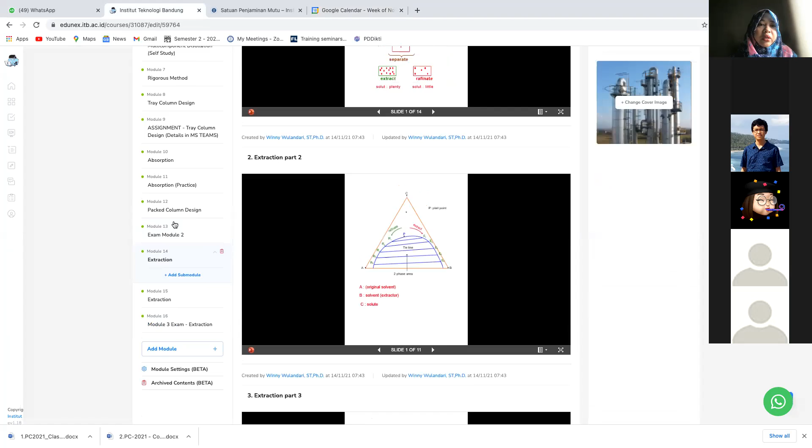Right, okay, go back to here. So we have the extraction. Now I'm going to go back and start the presentation about pack column.

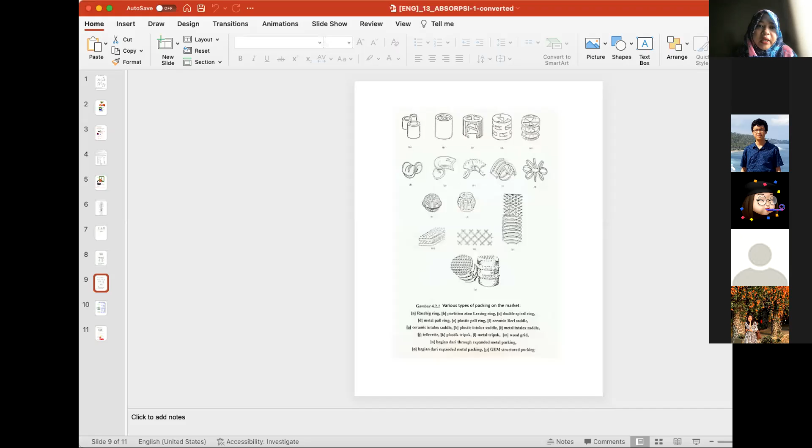Just to remind you about the presentation I gave a few weeks ago: usually for the pack column or tray column, we should be able to do the tray column presentation soon, so you can get feedback about your design and have more ideas how to design the pack column.

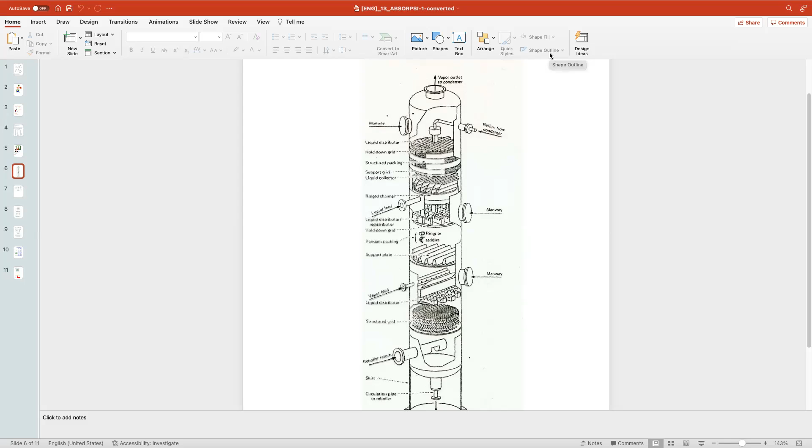Hopefully, yeah. Okay, so after this, you can see the assignments as well on MS Teams. Your next part is to design the pack column, the pack column for absorption.

This is very important, because — just wait, I need to close the door. Okay, so the oral exam, even for the tray column and the pack column, is good in a sense that it takes about 40% of your total exam, because we have 5 exams, so it counts 40%.

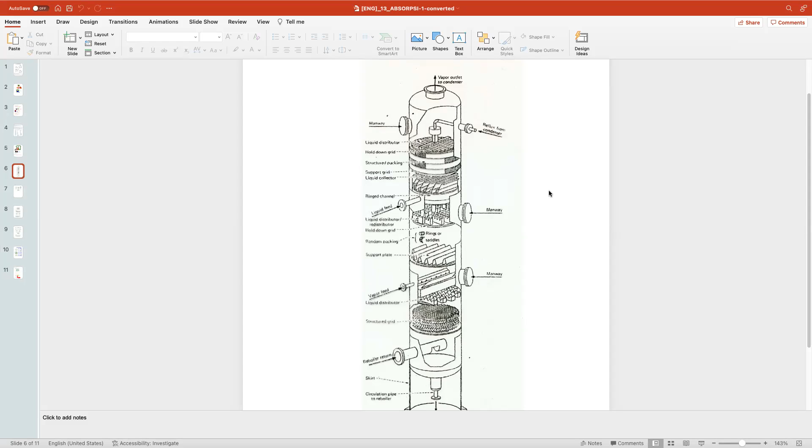Usually the mark would be much better compared to the written exam. So that's actually an advantage, and it also gives you skills about how to design something, which you should experience with your tray column design.

Okay, just a little bit of feedback on your report. In the specification sheet, it's like if we want to design something, or if you want to buy a design — let's say I want to buy Lego toys or something — I would look at the pictures. So the schematic of the equipment, the measurement and the technical drawing is very important in the specification sheet.

I think most of you didn't put the specification, didn't put the drawing of what your column looks like, but we would like to see — if you want to buy something, you need to imagine what these things look like.

If you want to design the tray column, you need to know how much is the height, how much is the diameter, where is the manhole, where is the side hole, what is the type of the cap, what is the spherical shape, and where are all the parts. This is also the case with the pack column.

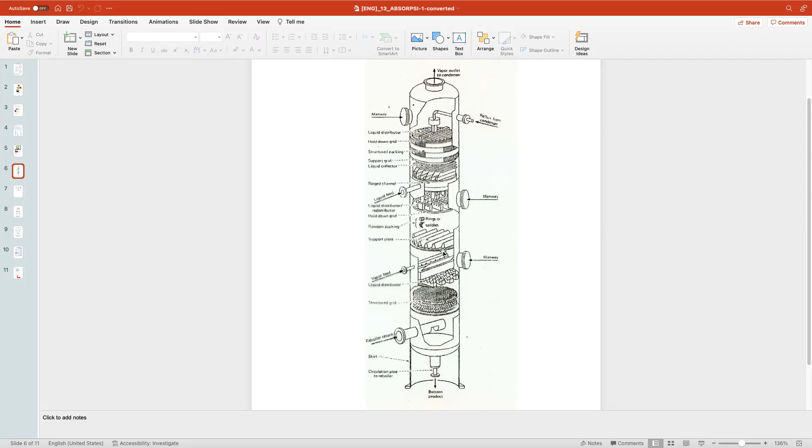In a pack column, when you want to design it, you also need to consider the manhole or manway, the hole and manway, and then the distributor, where the vapor feed comes from, or where's the vapor out, and then where is the liquid feed, and so on.

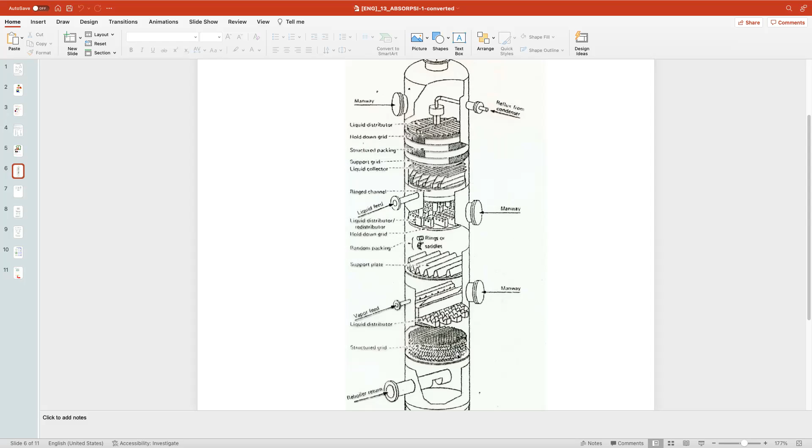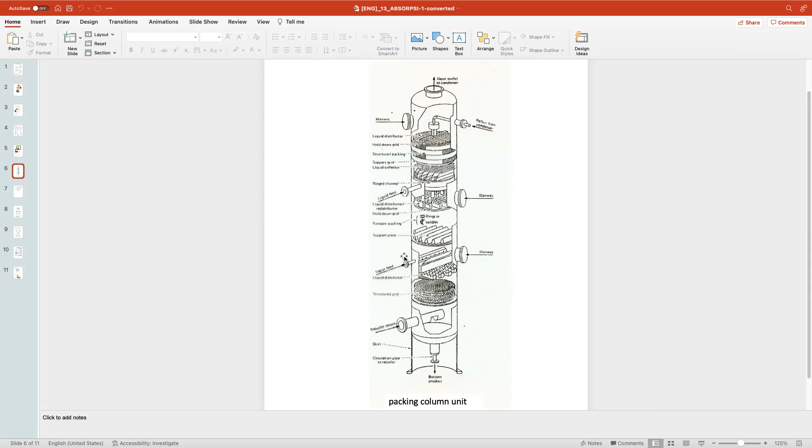You also need to understand that the height of the packing that you design is just the height of the packing itself. If you look at a typical tower, there are rooms inside - for the cap, for example, there are quite a few rooms. So your total height of the column, when you design it later, should be the total of the pack column, the packing, with addition of some other accessories. You need to consider that.

We also talk about the type of distributor, the type of packing, and you may want to have a look at these slides.

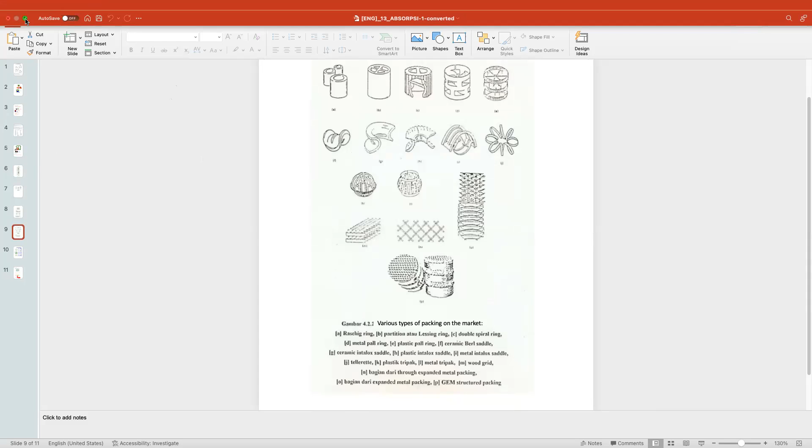Now let's start checking the pack column for today. What we would like to do, what you should aim for, or what you can expect from listening to my presentation, is that you should be able to know how to design or determine the height of the pack column, and also how to design the column.

This is very basic - we know it already, and you had the exam last week, that the height is actually the height of the unit multiplied with the number of the unit. For example, if we consider the overall gas, then the height is influenced by HOG multiplied with NOG.

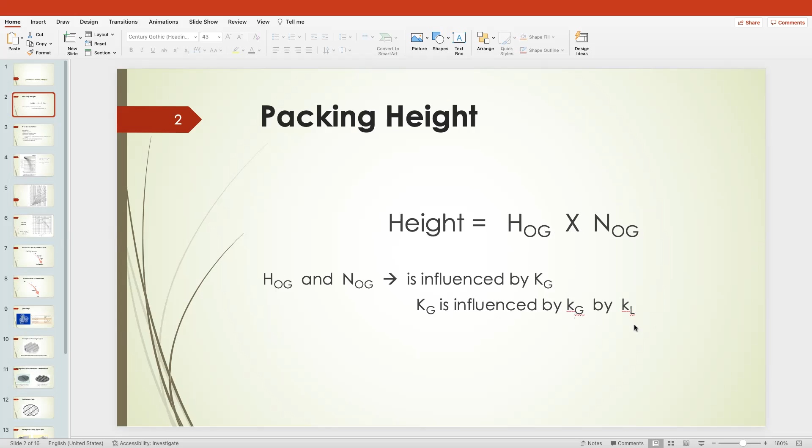If we consider this basis with the overall gas, then we need the capital K, which is the mass transfer overall for gas. It is also influenced by the small kg, and also small kl.

In the book, you may want to revert to the Coulson and Richardson book that you should already have, and find the section about pack column design. I don't remember the exact pages, but you may want to have a look at the section about column design.

First we calculate the NOG, the number of transfer units based on the overall gas mass transfer. To calculate NOG, the book uses different approaches. Do you remember what is the formula to calculate the NOG or the NTU?

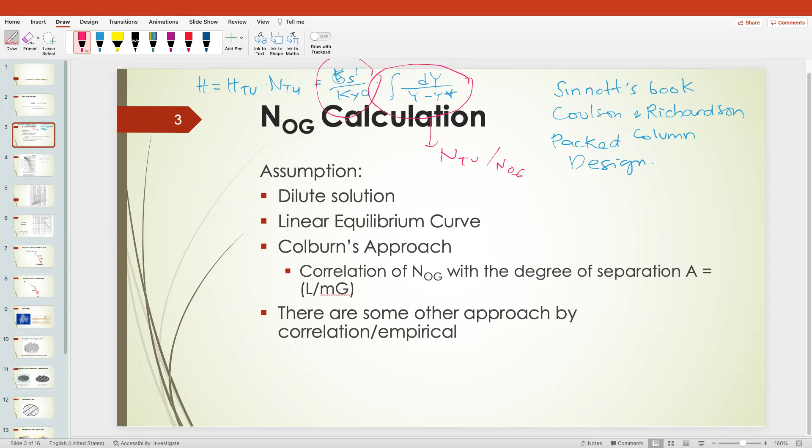It's the same. If I remember correctly, it should be GS dash divided by KYA, multiplied with the integral of dy, divided by y minus y star. This part tells you the N, the NTU or NOG, and this one is the HTU or HOG.

If we do it manually, it takes a little bit of time, because first we have to draw the graph and find the gradient of the relationship between y and the y in the equilibrium, find the gradient a few times, one by one, and then do the integration using the trapezium method or rectangular method to get the number of NTU. That is the one you learned in the past few weeks - just one of the options.

Another option is what we call the Colburn approach, which correlates the NOG, the number of overall gas transfer units, with the degree of separation.

We call it A, which is equal to L divided by mG. L is the amount, or the rate of the liquid, and G is the rate of the gas. For a much better approach, there is a correlation and empirical approach.

If you look at the next slide, this is the Colburn equation, based on the empirical equation. Based on many experiments, they plot it. This is called a nomogram, which you find a lot of in chemical engineering, because engineers like to plot the data, the outcome with correlation, and it is quite empirical.

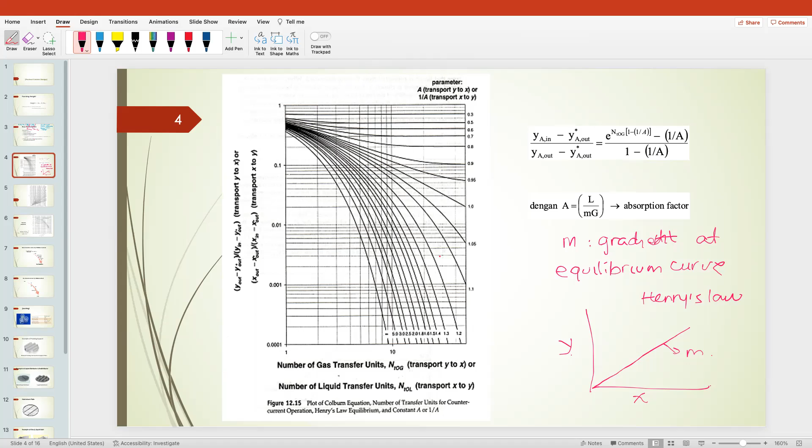Have a look at the books. There are typical, maybe good, ranges of mGM over LM. Another one, this one also the same.

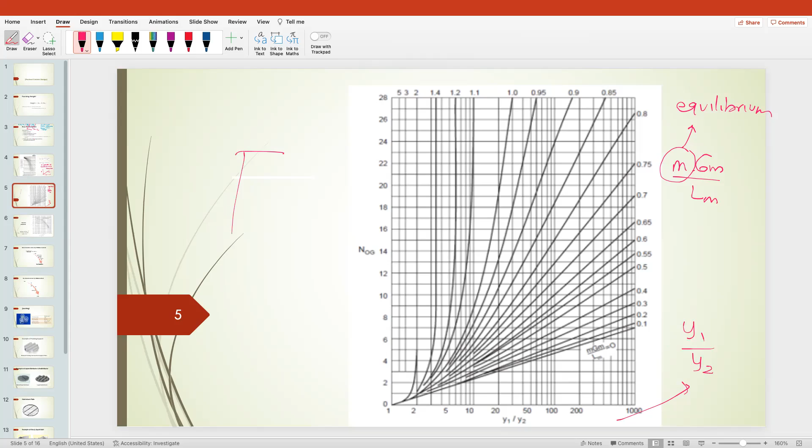If you remember, what is y1? Y1 is the gas that's the feed, the gas coming inside the absorption, and y2 is the clean gas. So you want to check what is your degree of separation.

Degree of separation: if, for example, you want to have a higher degree of separation, you may want to have a high NOG. So for example, let's say if you have a degree of separation, my y1 divided by y2 is 20, so maybe around this area.

And then you may want to pick one number which is mGM over LM. Over here, for example, I pick up 0.7, let's say, and then I can read it over there, and then read it over here, and I can read my NOG. So it is much better if you use the graph here, because you don't need to do the calculation and also do the integration, the tabling, and then the integration.

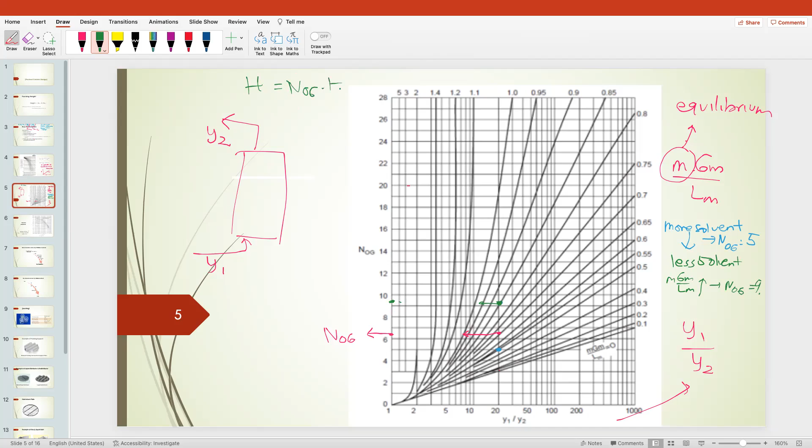Because the overall height is actually the NOG multiplied with HOG, if you increase the number of overall gas transfer units, then you're gonna increase the overall transfer — the height of the overall transfer.

So that implies that if you use less solvent, then you will need a higher tower. Higher tower means more cost for your capital cost — the cost to erect the tower, the cost for the material for the tower is gonna be taller, the tower gonna be taller. So this is about the trade-off between the height of the tower, which is the capital cost, and the solvent, which is the operating cost.

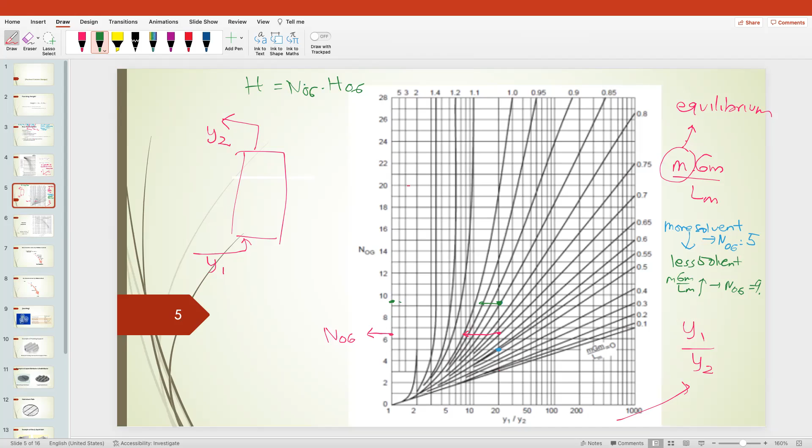Okay, so that is the NOG. And the next one you want to calculate in the assignments is also how to find the column diameter. Usually I will ask how to calculate the height and how to calculate the column diameter. Before we calculate the HOG, the height of overall gas, sometimes it's good to find how to get the column diameter.

The column diameter is actually using several terms there. So this one, there's a graph which is to find the K, and the K is actually you can get if you know the LW star divided by VW star, and also the square root of rho V over rho L. So in a sense we can find the column diameter once you know the area later on.

Similar to the tray column calculation, and then in the book there are also rule of thumbs, which include the flooding line, and also how much is the pressure drop — the pressure drop you want to see for the millimeter water per meter of pack height. Then you can calculate the FLV, and also calculate this factor and some sub factors, and then you will find if the pressure drop is still inside the requirements or if it's over the requirements. So then maybe you want to do the iteration.

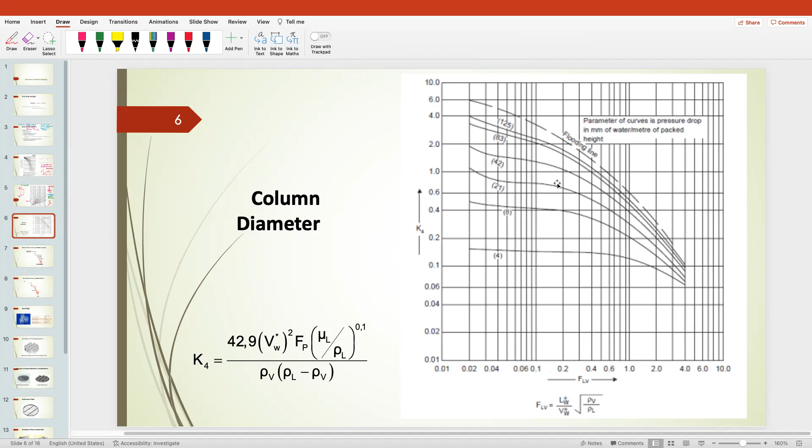And then for the HOG, there are also two types of methods that you will find. You may want to check with the algorithm of the book. So maybe I would like to check the Sinnott one here because there are no details in here.

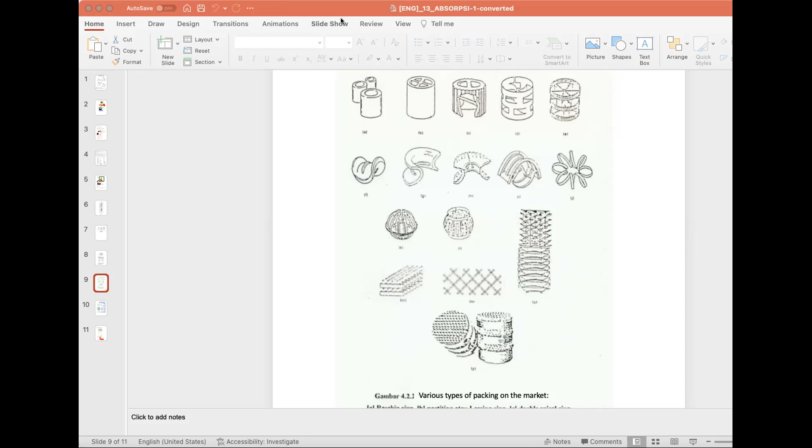Okay, oh, I'm still sharing. Am I still sharing now? Hello? You're not sharing anything now, Bu. Okay, how about previously? I'm still sharing. This one, sorry. Because mine was which one? Okay.

Did you see these slides or not? Yes, Bu, but just now. Okay, why didn't you tell me? Because the slide was moving, Bu. What do you mean, Bu? I thought you were talking about this one. Do you see this one? Yes, Bu, oh before, okay. I thought it was the previous one, and then I don't know. I thought it's good if you see my screen now.

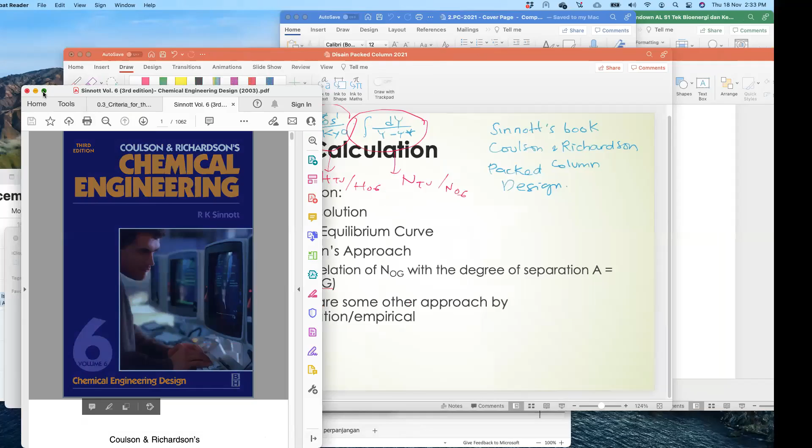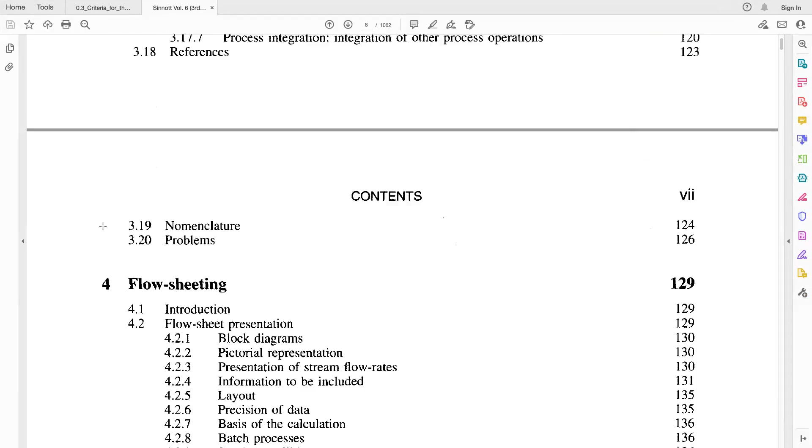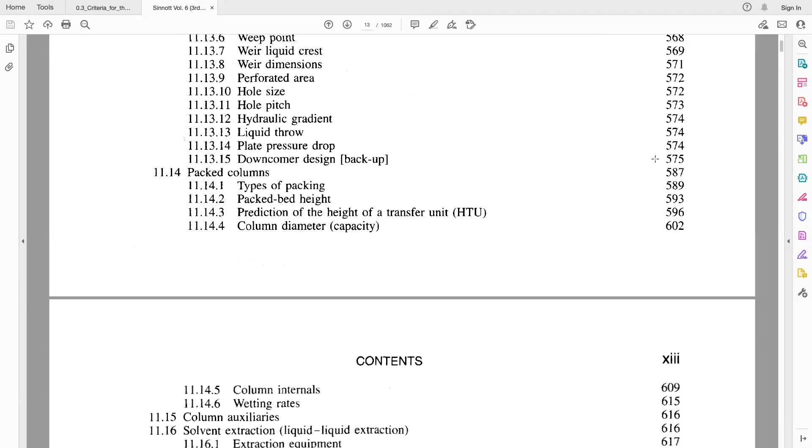Okay, let's have a look at the Coulson and Richardson. Just give me one second. Right. So you may want to look close to the separation one, the packed column, page 587.

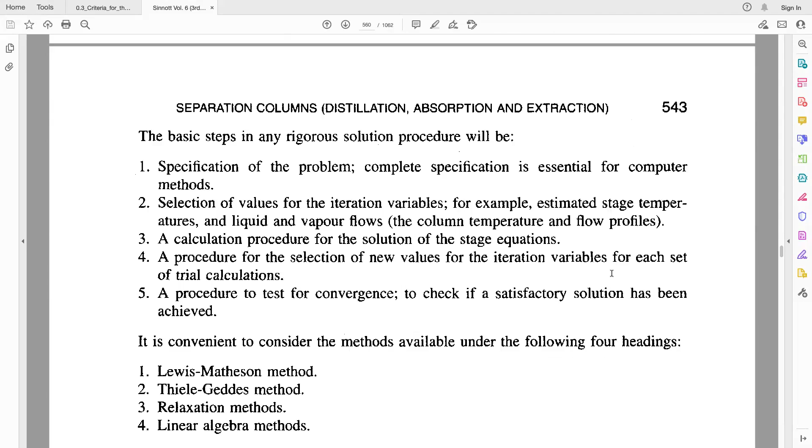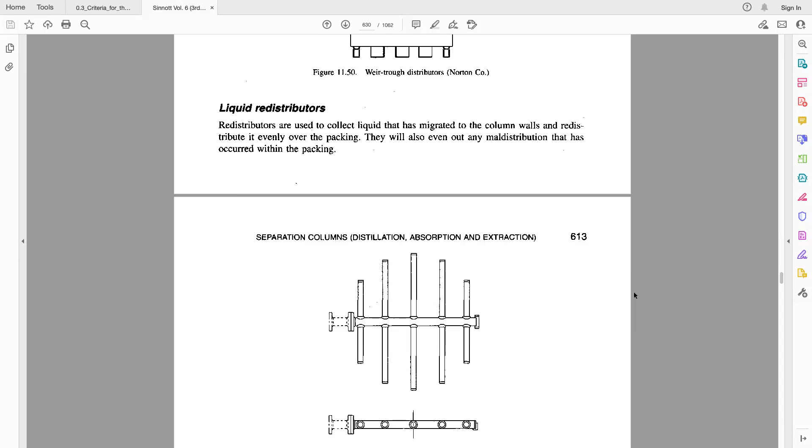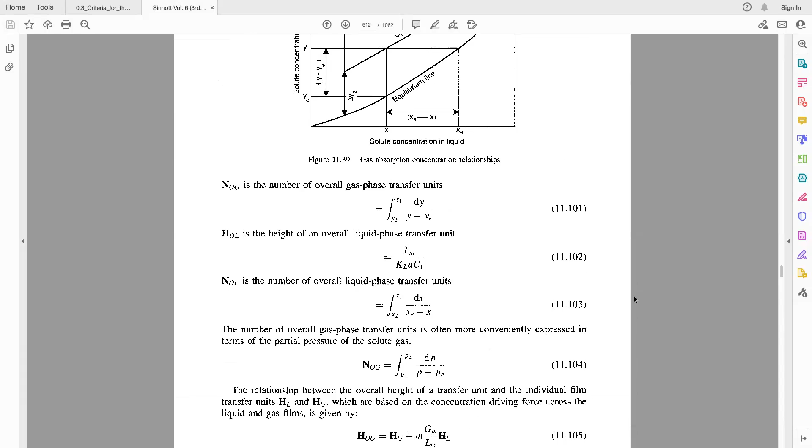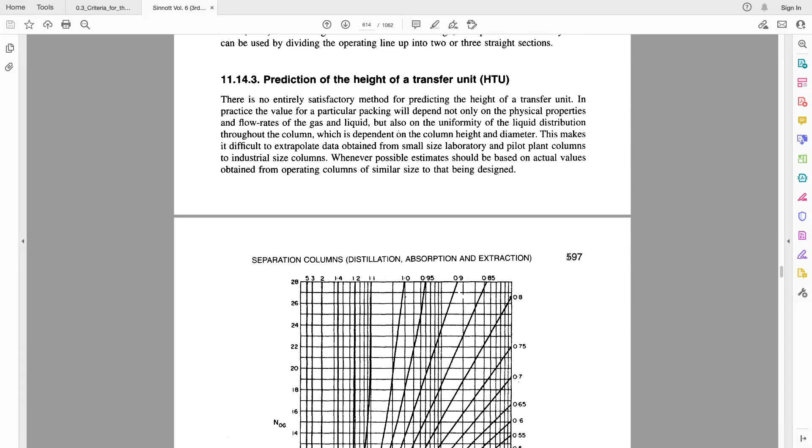Okay, so you're going to have this one. It is better if you can read this one from the beginning, based on the packed height. You want to try to find page 597. This one I just shared with you, and the second one later is the Cornell method.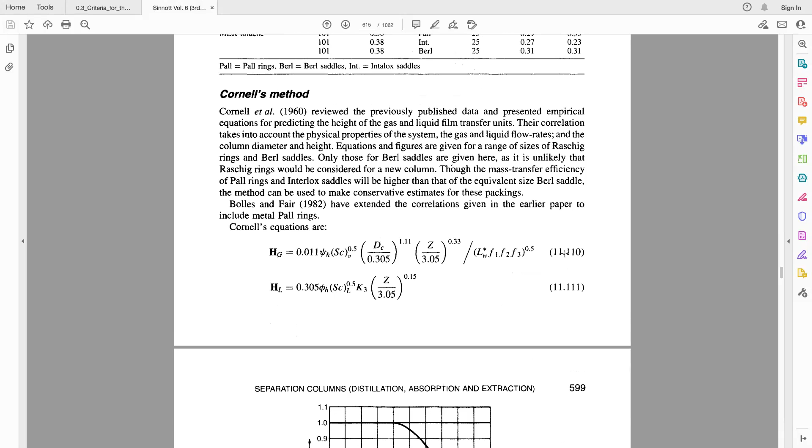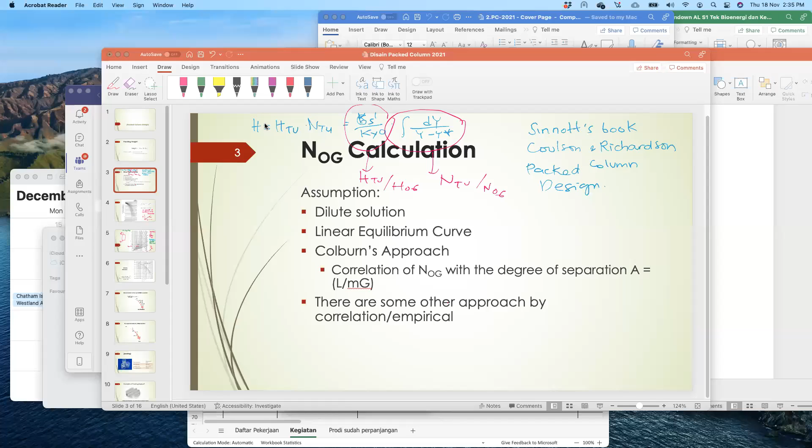In the Cornell method, you want to calculate this. Let me go back to here. Okay, so let's write that, see Sinnott, page 597 onwards.

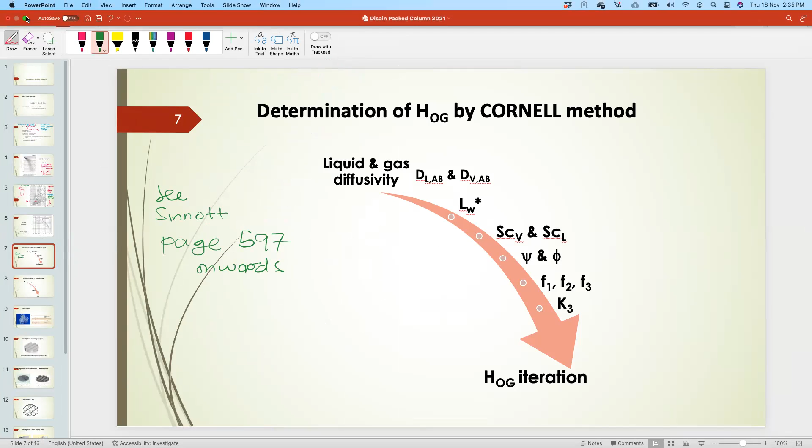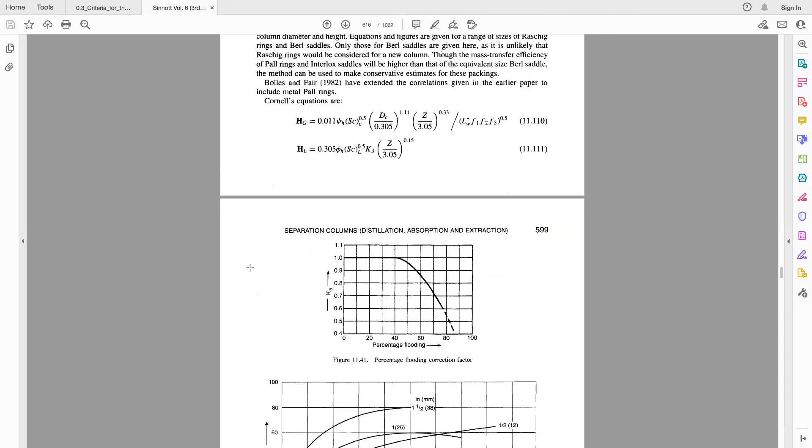So the formula for Cornell is this one. Let's see, okay, it hasn't been put into the slide, so I think we just need to put it there, just to add more.

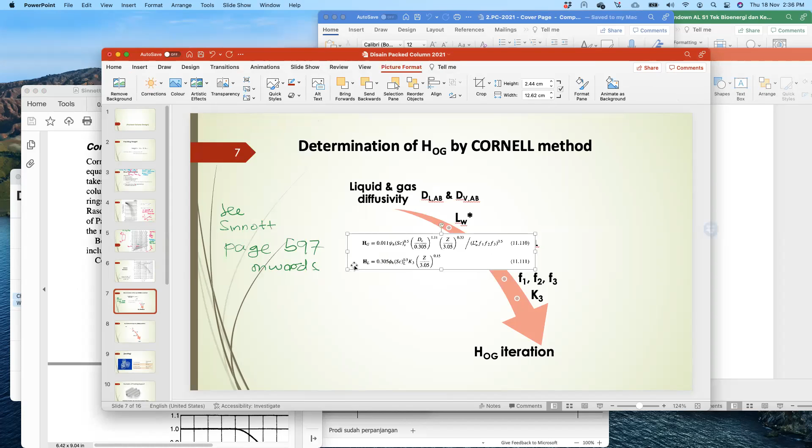So there are two methods to calculate the height, the height of transfer unit or height of overall gas. The first one is the Cornell method, and you may want to check more detail in the book, but let me give the formula. Basically we need to calculate HG and also HL, and then combine them.

The HG and HL comprise many properties, such as diffusivity in the liquid, diffusivity in the vapor, the weight of the liquid rate, the Schmidt number, some factor psi or phi, and also some function. So basically we have to calculate this based on the properties.

After that we find z and do the iteration again to find the real z. So here we do an iteration to guess z — we check the z first, for example 10 meters, then calculate HG and HL, find the total height, and do it again to find which one is the height.

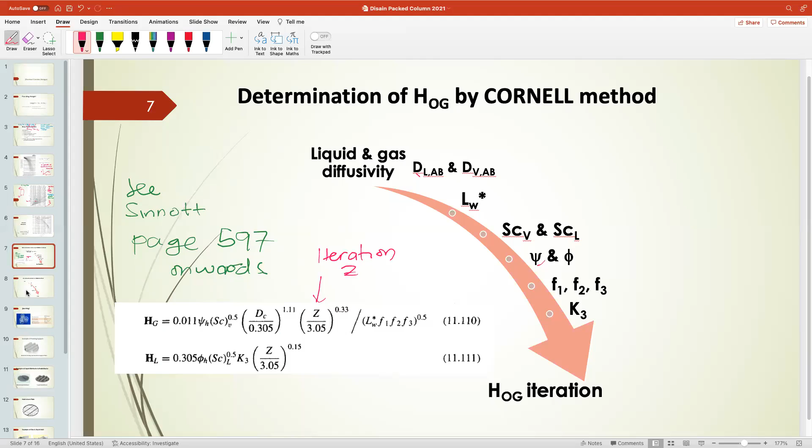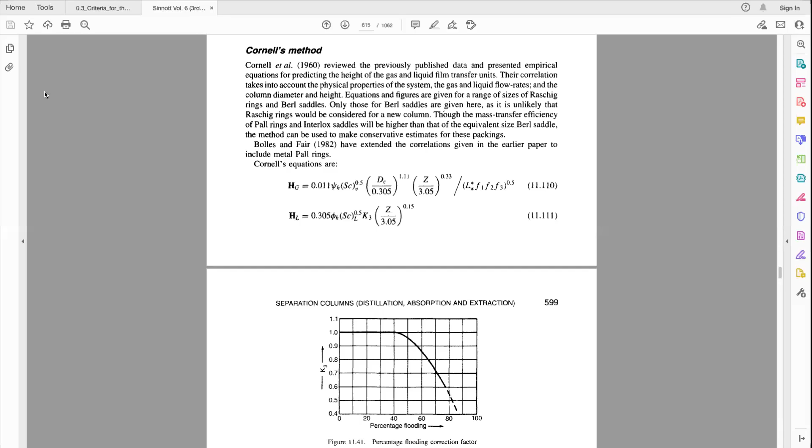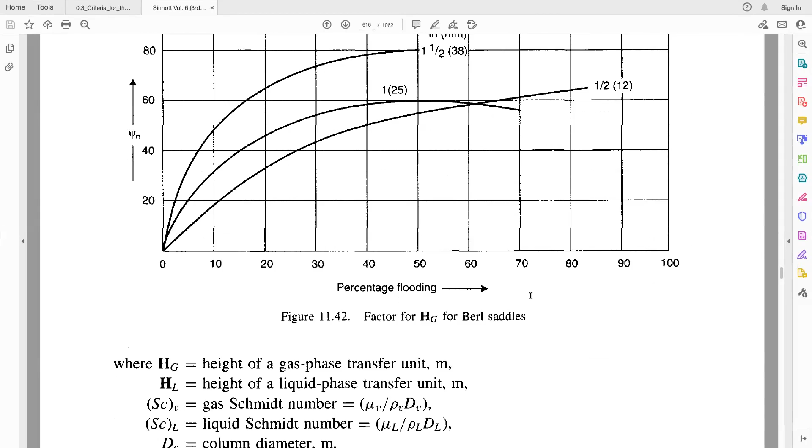The second one is called the Onda method. I need to open here again because it's not that one. Okay, so this is the Cornell method — you may want to find factors about the flooding factors, and also factors based on the type of packing, and some percentage there.

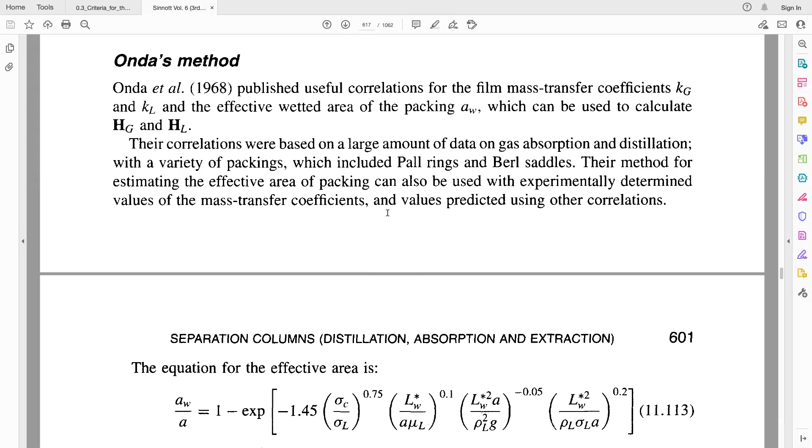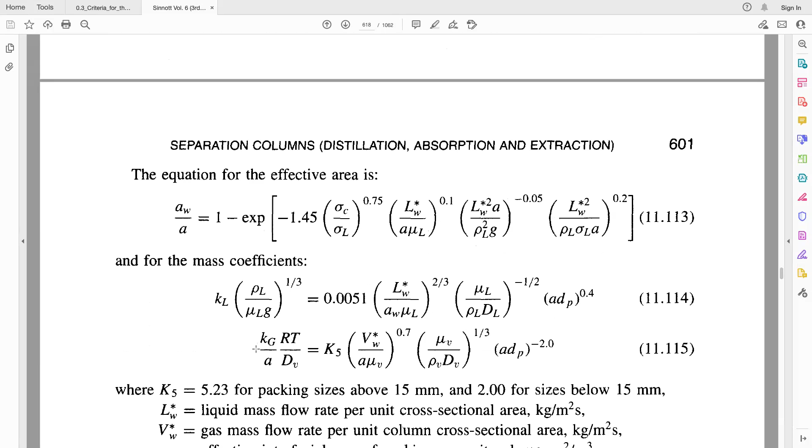The second one is called the Onda method. In the Onda method, you also want to find the k coefficients, and this is all the formula. You want to find the wetted area or affected area first by checking the surface tension, the liquid rate, the weight of the liquid, the effective area, and so on, and also find the mass transfer coefficient using these formulas.

Okay, after that, in the Onda method, you want to find Hg and also Hl. Hg uses the formula Gm divided by kG, divided by the wetted area, divided by the pressure, while Hl is Lm divided by KL, AW, and CT, and then the concentration. Then you want to find the overall height.

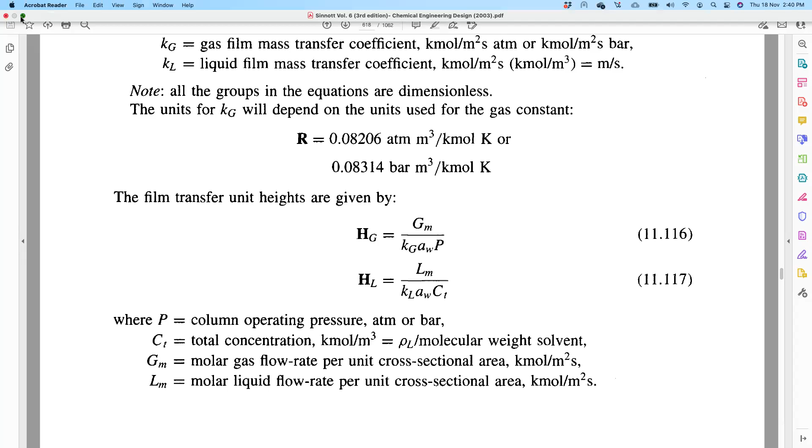Usually you need to calculate both methods, and once you have the height, the one you use for design is the highest one. For example, using the Cornell method, you have 10 meters height for a typical diameter, and using the Onda method you got 8 meters. The height you calculate for design, for further design, is the highest one, maybe 10 meters. So which one is highest, Cornell or Onda? Usually Cornell is higher, but I don't know, you want to check with your own problems.

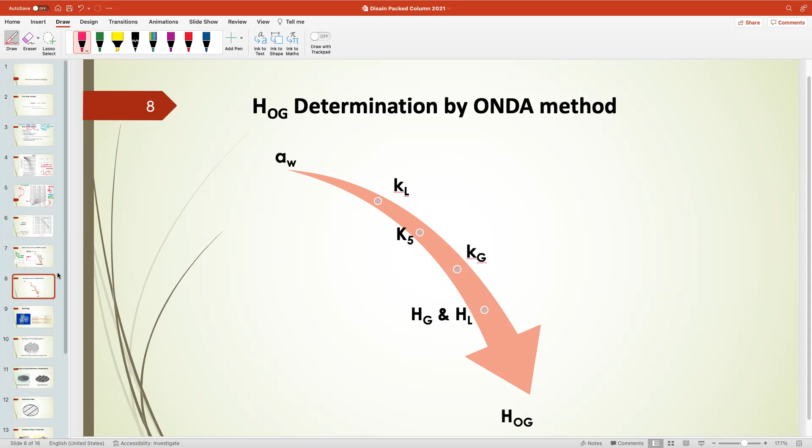Later on in the assignments, we will give you the type of packing. Usually the graph in the book is customized for each packing. If you can't find the data in the book, you may be able to change your packing. For example, this one is Raschig, and then Pall rings. But if the book has no data for Pall rings, you can ask me or Bu Grace to confirm, and then you change the packing. Because each packing has a typical correlation for flooding, for wetted area, and for the coefficient as well.

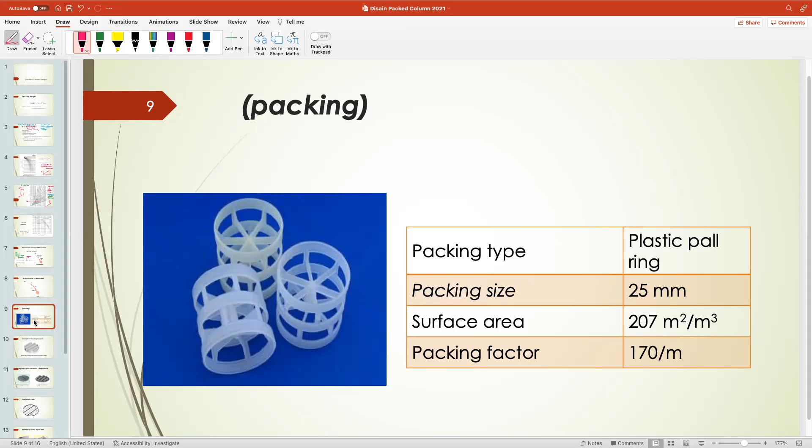Also don't forget to put the packing support. The addition of packing support will also increase the height. So you also need to calculate the accessories.

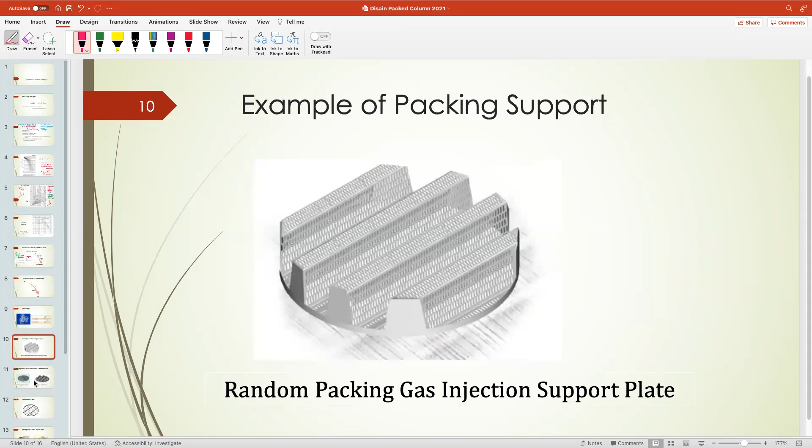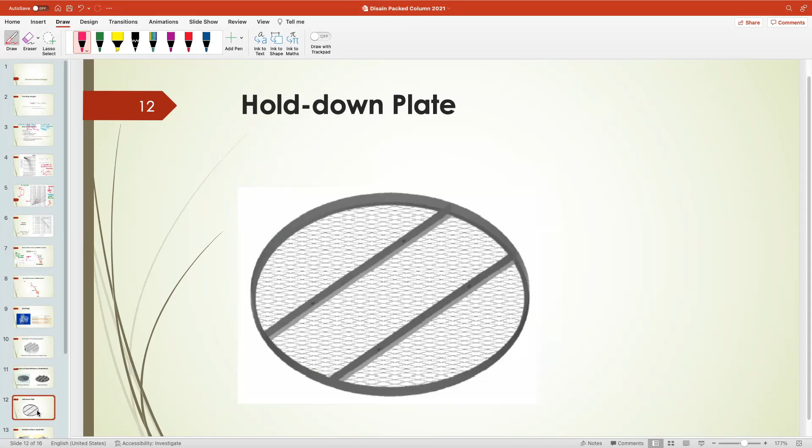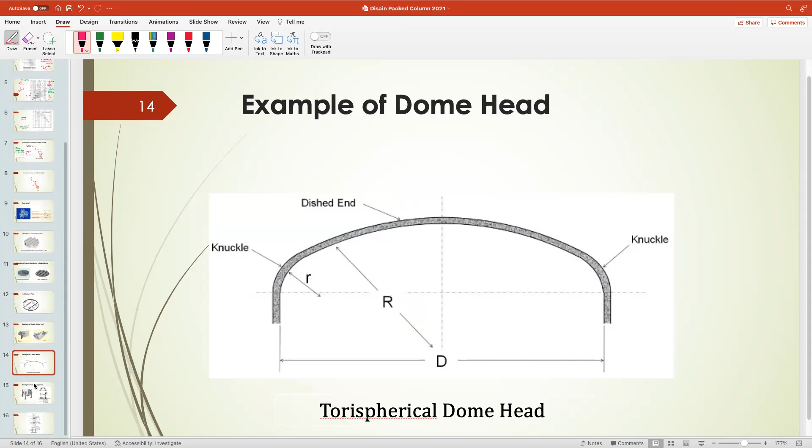And then don't forget to put the column support, like in your tray design. So this is a typical drawing. You may want to put the packing support, and then the hold-down plate. If you use more than one pack, if you divide your packing into 1, 2 or 3 sections, don't forget you have to put a redistributor again in the middle.

The higher the tower, the more accessories needed, which of course increases the weight and increases your cost. There should be a rule of thumb for when you have to divide the packing. I think it's about if it's more than 4 meters you have to divide the packing, but check it with the book, I'm not really sure.

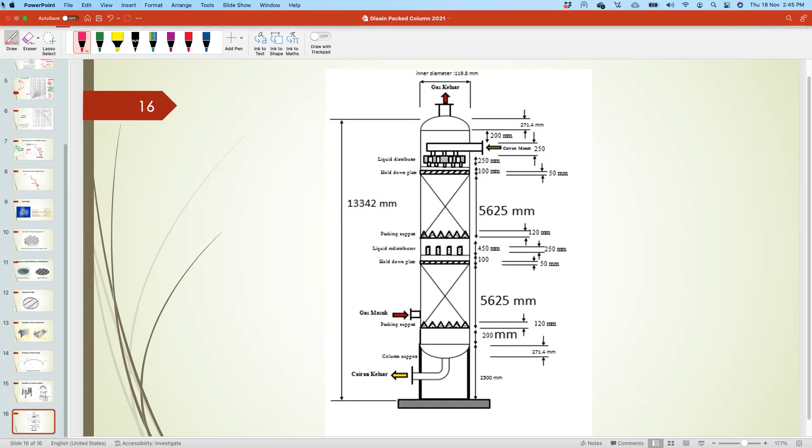This is actually the one that you will explain to me during the oral exam. So I will be asking you again about how to design the packed column.

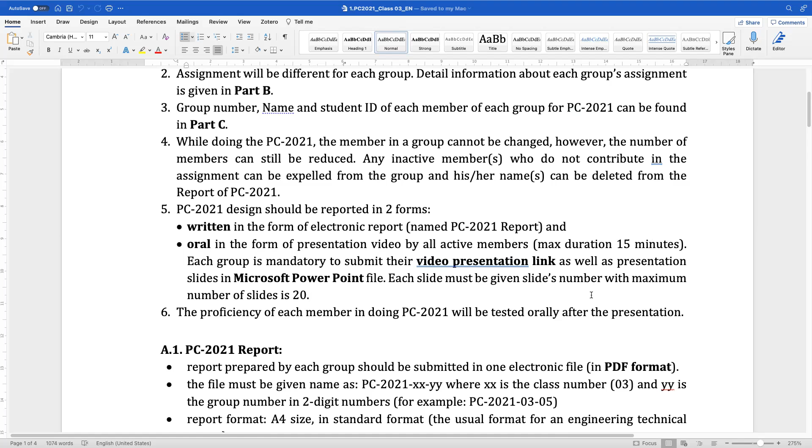After that, I will watch your videos and I will have a description about how you do the work and how you present your work. After that, it will be tested orally after the presentation.

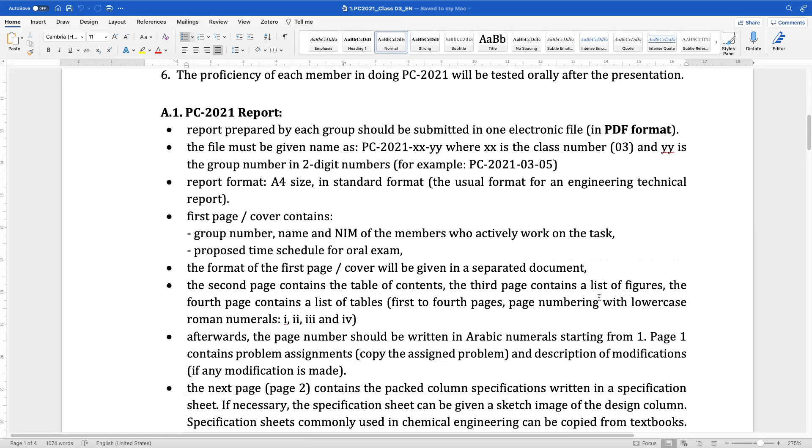Okay, so this is all the report. You want to have a look and check the type and the formats. Okay, let's have a look at the general instructions.

The students are asked to design the pack column complete with the internals, like I said before - the internal parts, the top parts, the bottom covers, and the column support, etc. Just add what you think is necessary for the pack column.

The column design has to be completed using 3 methods: Cornell, Onda, or if you want, using the Hysys program. It's not necessary, but you can try using tray sizing or pack sizing - it would be good if you tried just to check it using the pack column there, just to have a good comparison.

Also, the assumption is the absorption is operated in isothermal and constant column pressure, and the percent recovery is 90%, and the type of column packing is defined in this task.

But if the packing doesn't meet your requirements, the group may change the packing type and size, and the modification should be stated after the problem assignment.

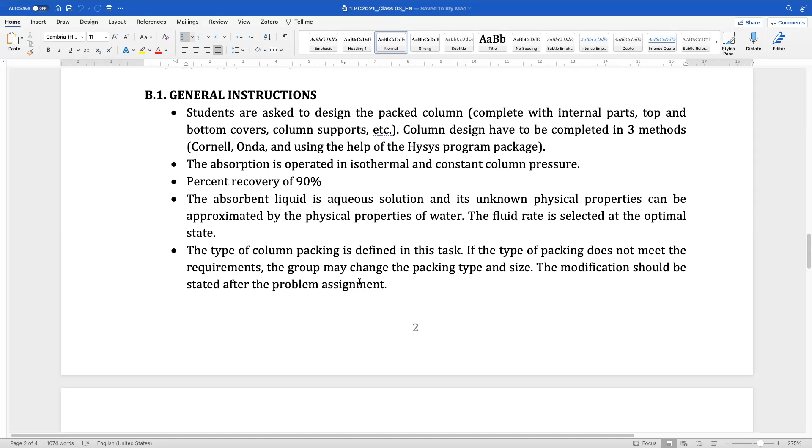Like I said before, we define the type of packing, but when you do the calculation, for example, if you don't have the data or it doesn't meet the requirement, you can change the packing type.

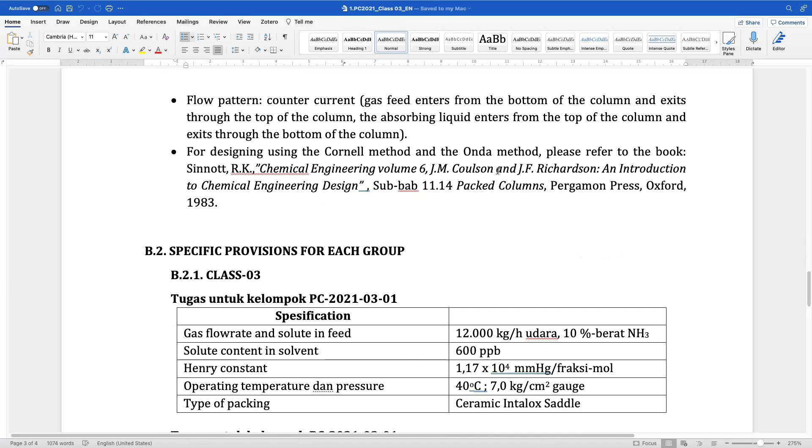Don't forget to check the book, Coulson and Richardson's Chemical Engineering Volume 6, Introduction to Chemical Engineering Design, around section 11.14, page 597. I'll share it with you as well - just check that one. So this is the number, the assignment for pack column 1, 2, 3, and this is the group members.

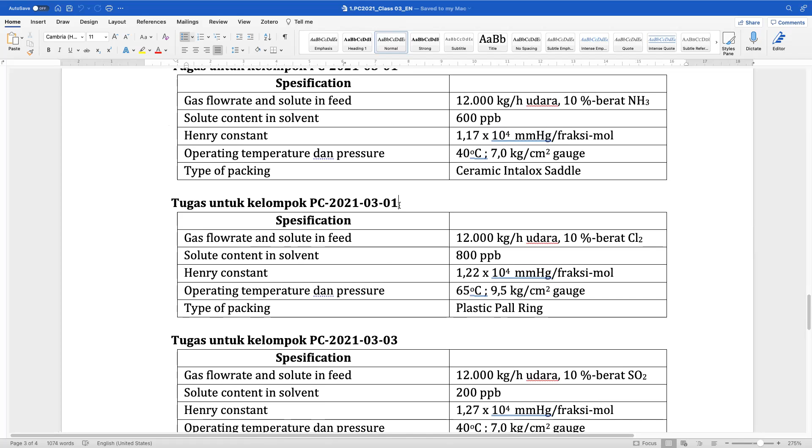Okay, I thought it was defined as well. Alright, and then...

Can you also guess when is the time? Maybe I can contact Dama to check when is the time for the tray column presentation. I think we can do it soon. When you're designing the pack column, you will have more ideas because you get feedback from me. Okay, any questions?

I want to ask regarding the recording and after that the oral exam. Is the recording included as the presentation, or do we present in the oral exam? I don't know, it's actually a bit confusing.

So for the tray column, you have to do the presentation for 15 minutes. But for the pack column, because you have already shown me the videos, I will go straight into question and answer.

So for the pack column, we just record ourselves and present it in our own recording time? For the tray column, you do the presentation in front of me, yeah. But for the pack column, you do the presentation with the recording.